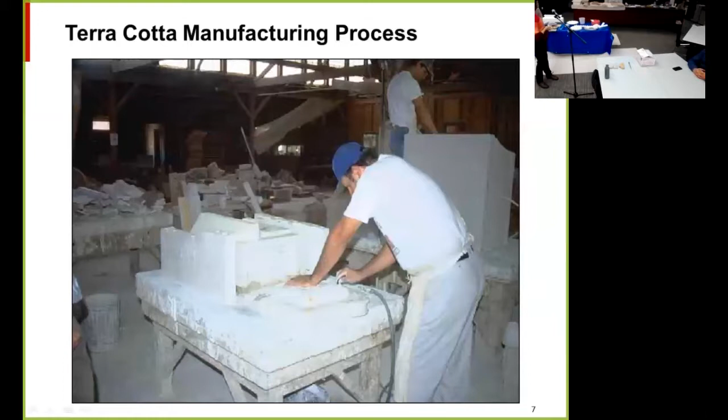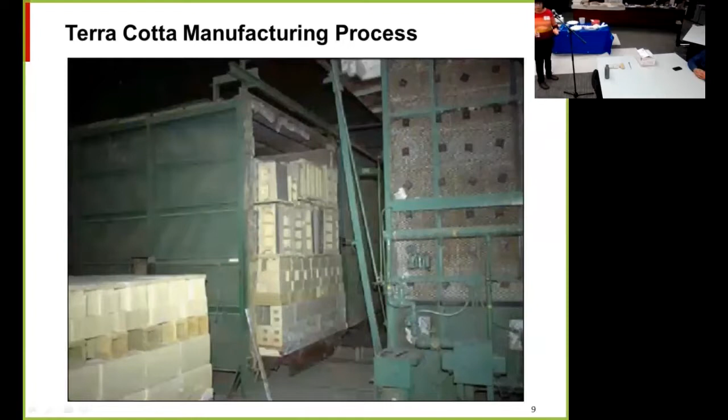They use local clays with different properties for the terracotta. After it's unmolded, it's cleaned up and glazed, then put on carts and into a tunnel kiln and fired, then boxed up and ready to ship.

So how is it used? As I said, it's used for cladding for a lot of different buildings. It originally became popular because it was easy and cheap, and we didn't have as much of a tradition of stone carving in the US and the West as you'd have in Europe. But with terracotta, you can carve one piece and then make more and more pieces from that. So it's kind of ironic that at the time it was originally a cheap imitation for stone, and now it's a very expensive material that we're trying to restore and retain.

The glaze allows all different kinds of colors. When it was originally made, it was advertised as needing no maintenance, and the glaze was thought to be completely impervious, so there wasn't a lot of thought given to flashings or waterproofing. It's also fire resistant, so it's often used for cladding. I have a couple of pieces up here.

You can see this is a piece of old terracotta from St. Dominic's Church, and it has a really red bisque or clay body. This was actually manufactured, I think, in Seattle, Washington State, so it's a little different than what we usually see on most of our buildings. This one is kind of a yellow color, Gladding McBean terracotta, a new sample of a new piece, and this is a piece from 140 New Montgomery.

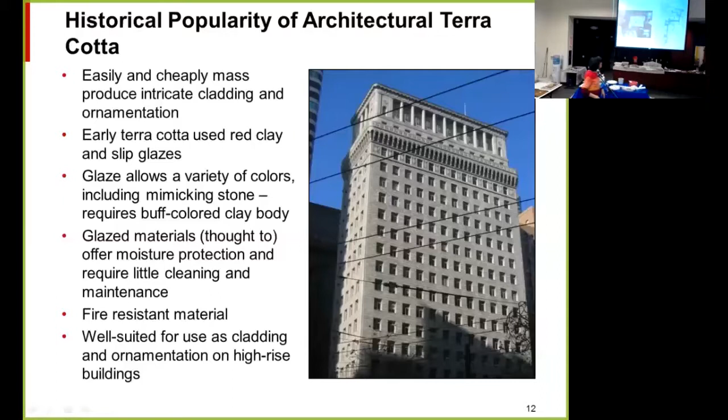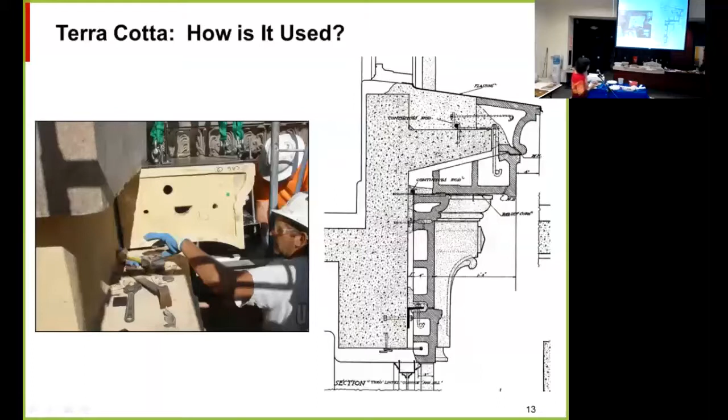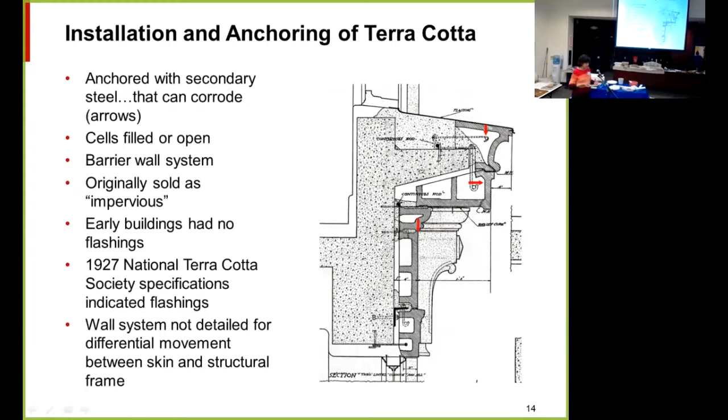Early buildings didn't have flashings, but then the National Terracotta Society, a group of terracotta manufacturers that got together to write standards and improve the practice, published a standard in 1927. They published specifications, and they did indicate flashings at that time. Another thing about terracotta buildings is the wall systems were not detailed for any kind of differential movement or expansion and contraction, and that'll become important later when we talk about different problems that terracotta has.

So how does it fail? Probably the most common type of failure we see are what we call glaze spalls, where little pieces of glaze start coming off, and eventually you can lose lots of the glaze of the terracotta. There are a lot of different reasons you can get glaze spalls. I think the most common one in California is that water gets into the clay bisque through a little crack or open joint or something, and then it's trapped behind the glaze.

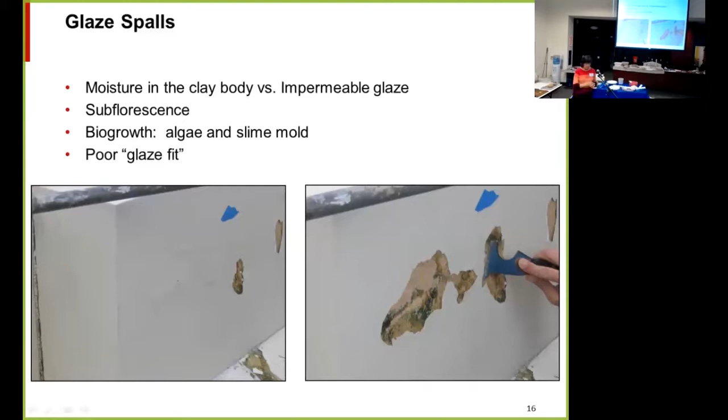Another reason we see less commonly is poor glaze fit. You don't see it anymore because the manufacturing of terracotta is so much better. But if the coefficient of thermal expansion of the glaze and the clay is different, it has poor glaze fit, and as it goes through temperature changes, or even just as it comes out of the kiln and is cooling off, the glaze can spall off.

Glaze crazing are those fine little cracks you might see on an old Chinese vase or antique. But we also see those on terracotta. I think those are caused during manufacture by a difference in contraction as the clay and glaze are cooling, and I've found that they're not usually problematic. I don't usually try to do any repairs to the crazing, because if it's just small, fine cracks like that, you can let them be. They're usually so small that water can't really get in there.

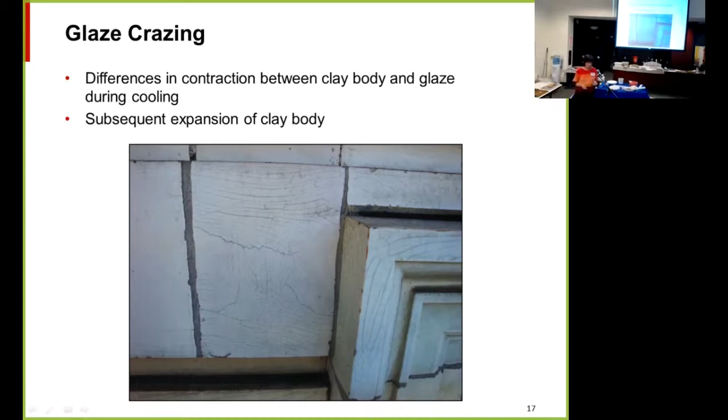Another problem is bisque spalling. Probably the most common cause of bisque spalling is corrosion of embedded steel. A lot of terracotta, as I showed you before in that cross section, is hung from mild steel, and then water gets in. As steel corrodes, as you know from this morning, it expands and takes up more space.

It expands enough that it can crack and spall the terracotta. Terracotta can also spall from freeze-thaw expansion, expansive properties of the clay, or an accumulation of salts in the terracotta.

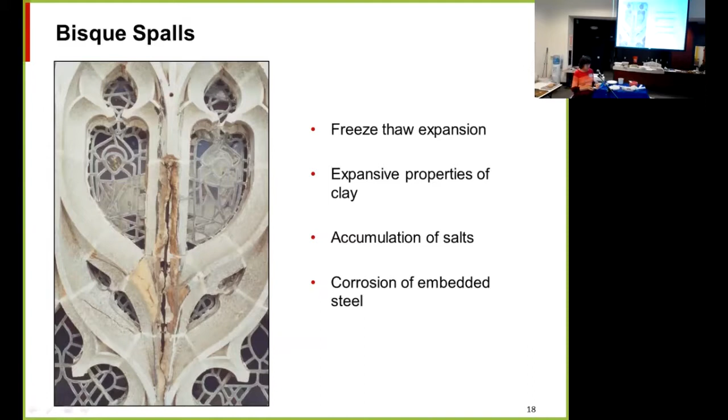Sometimes the failure of terracotta is really subtle and really hard to see. This is a building in San Francisco that I was just up on last year. I was on a swing stage really close to this, and I could see these cracks. I was with a contractor.

We were doing some emergency stabilization of loose pieces so they didn't fall onto the street. I said, well, let's just try and put some stainless steel anchors in this to hold it on. So he was getting ready to drill, and just this whole chunk of terracotta, about as big as my arm, just kind of came off in our hands. So to understand what's going on with terracotta, you really have to get up close to it.

I think you'll notice a theme as we go through here about terracotta failures. The enemy of terracotta is really water, and water getting into the terracotta and into the backup.

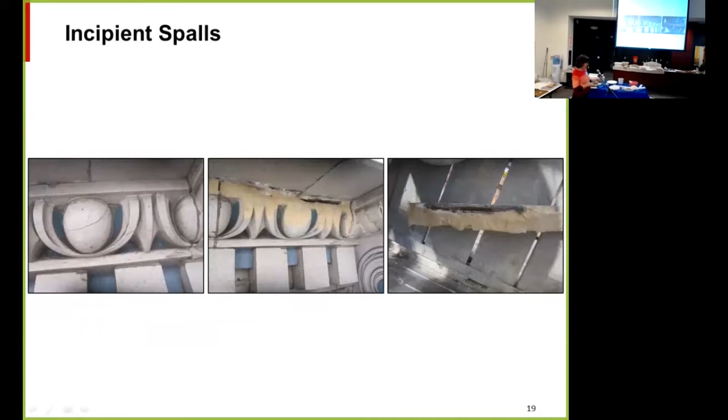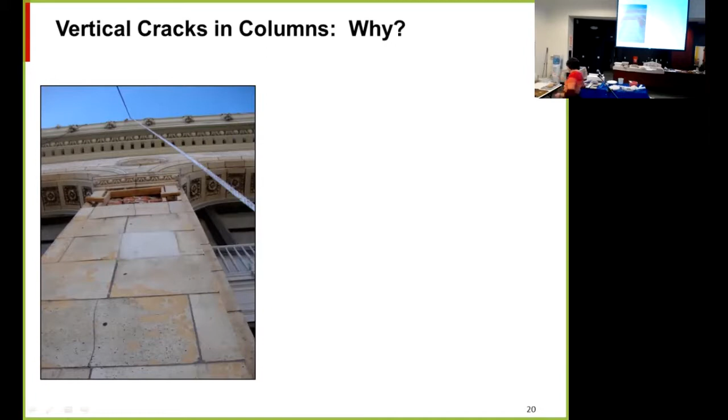Right. It has a steel column behind the terracotta, and that steel was corroding. So here's the steel column, and you can see the cracks coming right from that corroded steel column.

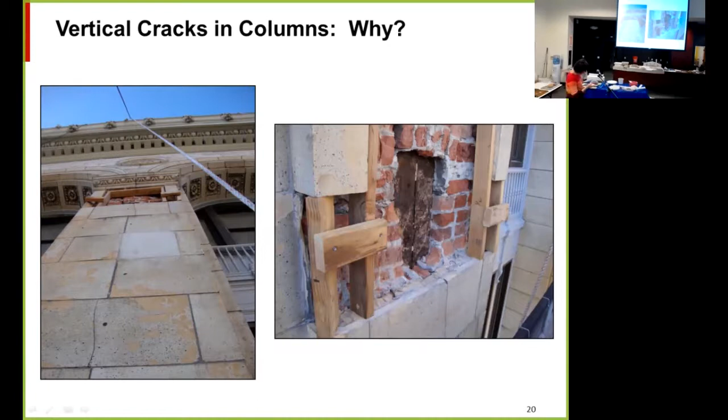Movement, that's true. Okay, so terracotta grows over time, like all fired clay products, like brick, but it grows much more than brick. So when you take a piece of terracotta out of the kiln, it's the smallest it will ever be. And over time, it's just going to grow.

This was a concrete frame building. Concrete shrinks over time. As you put load on, when it dries, it shrinks. And then as you put load on it, it also shrinks, doing something called creep. So this building had no provisions for expansion and contraction, and it was basically tearing itself apart because the internal frame was shrinking and the terracotta was growing.

There was also a problem with shelf angles that didn't quite reach the corner. I haven't seen this as commonly, but I've seen it before. Shelf angles are a pretty common problem.

A lot of times you'll look at a brick or terracotta building and see these vertical cracks right up the corner. It's because they didn't know what to do with the shelf angles coming from one side and the other side, and at the corner they don't quite meet and there's no space for them. So then you have every story of terracotta supported on the shelf angle in the middle of the wall, but at the corner it's just kind of stacked up from the ground. And those things are going to move differentially.

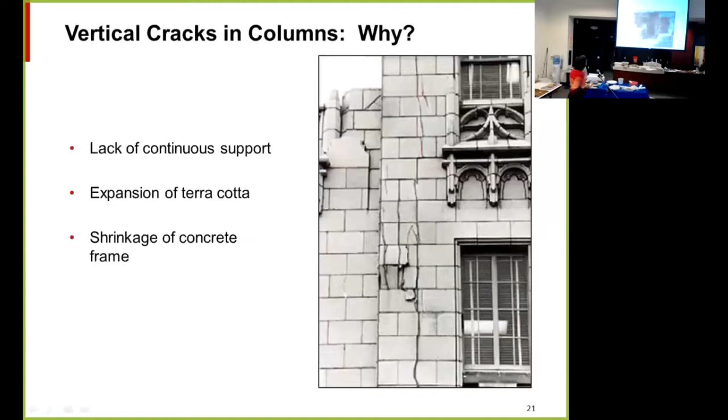There is a column going down through the middle of the bricks, and when we first saw the cracks, we thought that column's corroding. But then we did our openings, and the column was not corroding. So what was causing the problem here?

Right, right. So these are header bricks, and they should go back through a couple of wythes of brick. But in this case, they didn't. They were false headers - they just cut them off. So there was no real attachment of brick back to the steel.

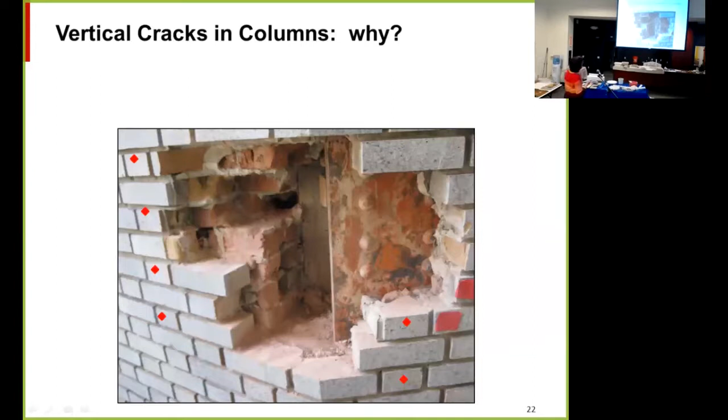And how about that? Also from an earthquake, that's pounding damage, a lower part of the building pounding against the tower it's built right next to.

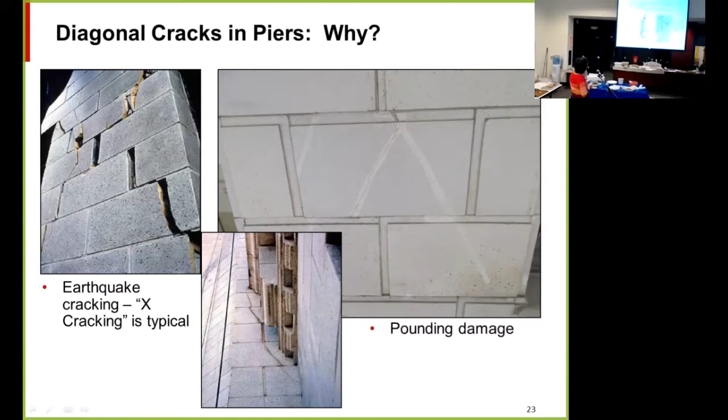So I talked a little bit about shelf angles. Most terracotta you'll see is on transitional masonry buildings, which are steel frame buildings with brick or concrete infill and a terracotta cladding. The terracotta rests on top of the shelf angle.

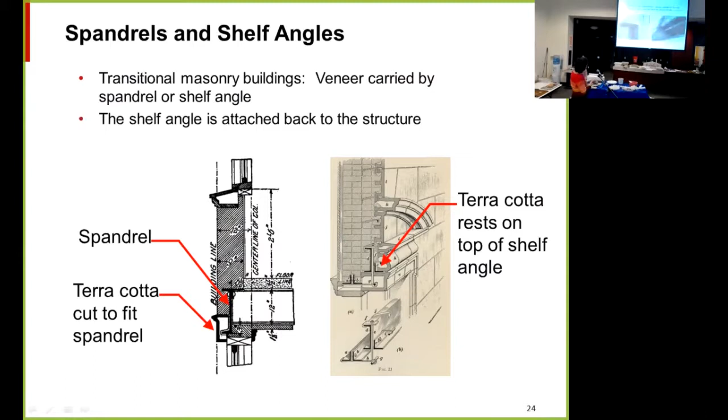Shelf angles and lintels, by their nature and function, are really close to the outer surface of the wall. That means once water starts getting into the wall, they are the first things to corrode, so they're really vulnerable. And when they start corroding, they crack the terracotta.

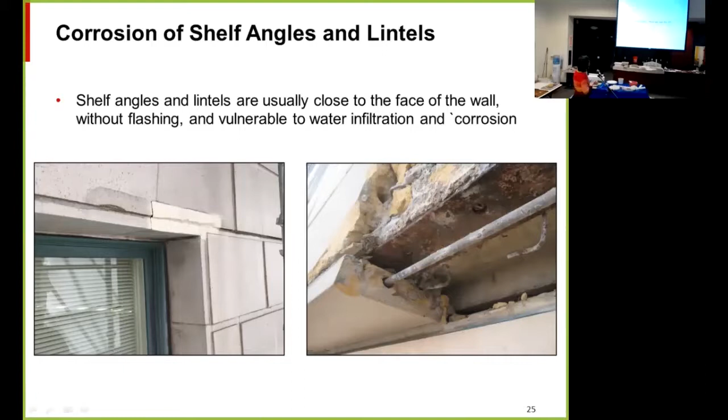All right, how do we fix it? I think, as other people have talked about, before you can decide what you're going to fix, you have to know what the problem is. So you have to do some investigation, and once you figure out what the problem is, how many of the problems you have and where they are, you can start designing your repairs.

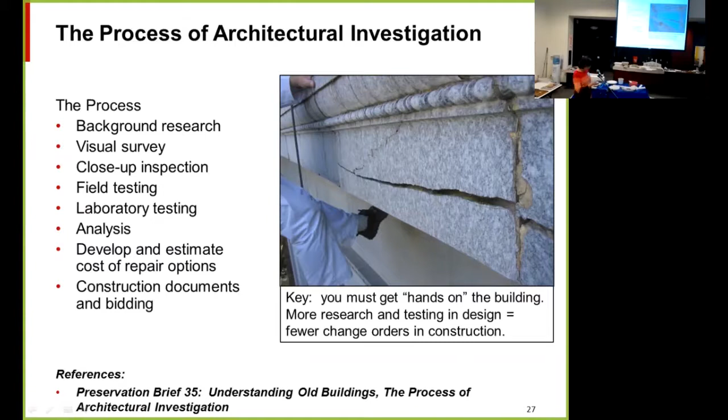How the Secretary of Interior Standards applies: it allows for the repair and replacement of deteriorated features while maintaining the historic appearance.

Generally, we try and repair rather than replace. Sometimes we have to replace features either because they're too deteriorated to repair or because they're covering something that is the root cause of the problem.

For example, that column cracking I showed you is because of the steel underneath it corroding. There's really no way to repair the steel except to take the terracotta off, clean up and paint the steel, and replace it.

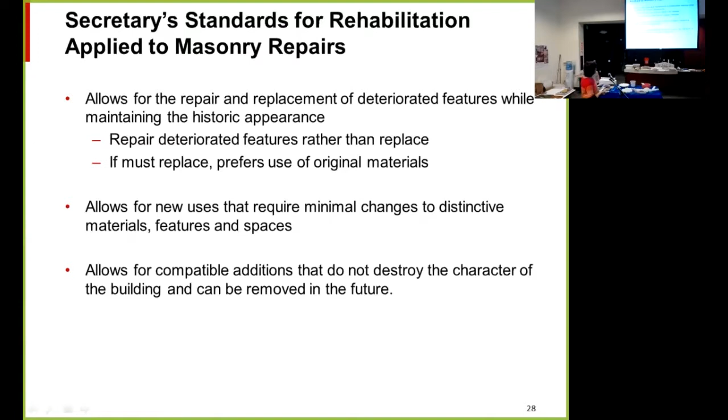As you know, there are 4 different Secretary standards. Rehabilitation is the one we most often use that seems to apply to this type of facade repair. It allows for new uses that minimally change the materials and features and allows for compatible additions.

So I guess I talked about this a little bit. You want to diagnose the problem, maybe look at a range of different solutions, try and repair rather than replace, and replace in kind if you can. There are a lot of substitute materials for terracotta, but you have to understand the ramifications, both visually and performance-wise, of using substitute materials, and understand the visual implications and durability of repairs.

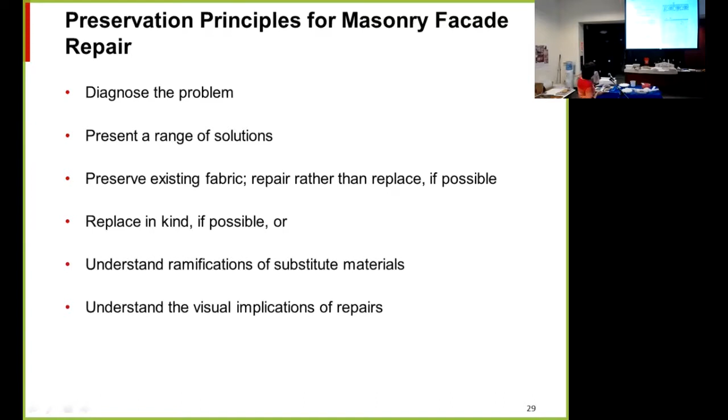So there's a couple of different approaches. One approach for surveying a building and getting the project out to bid is to do a 100% survey. We have done that, where we go and look at every single block of terracotta.

Put everything on CAD drawings in the field using a tablet. The advantage is you can get much more precise bids, and sometimes that's really required by public agencies who want to know exactly how many blocks they're going to replace. The disadvantage is there's a huge upfront survey cost because you have to get on a swing stage or whatever to get up close to the building and survey every single block.

And even after you've done that, inevitably something will happen during construction, like you start taking blocks apart and the backup wall isn't what you expect. So there's no guarantee there's not going to be some kind of surprises during construction.

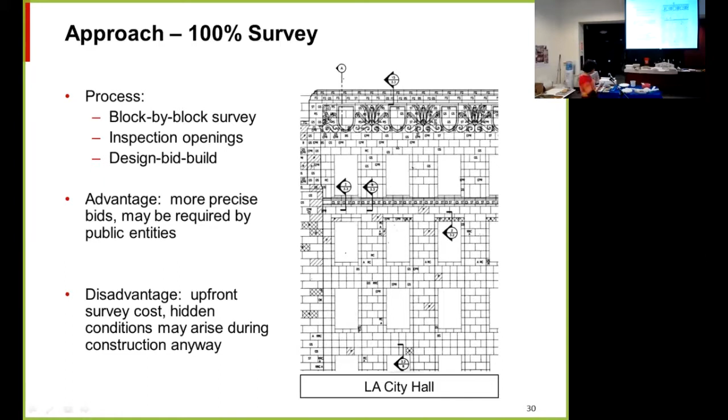The other approach is a partial survey. To do that, usually we start with a binocular survey, pick out areas we think look suspicious versus areas that look typical, and then do a close-up survey of a representative area.

When we do that, we usually try to bid with allowances and unit prices, so that if there are more or fewer repairs, that can be adjusted using the unit prices. That has a much lower upfront cost, but the disadvantage is there's more of a risk of change orders during construction.

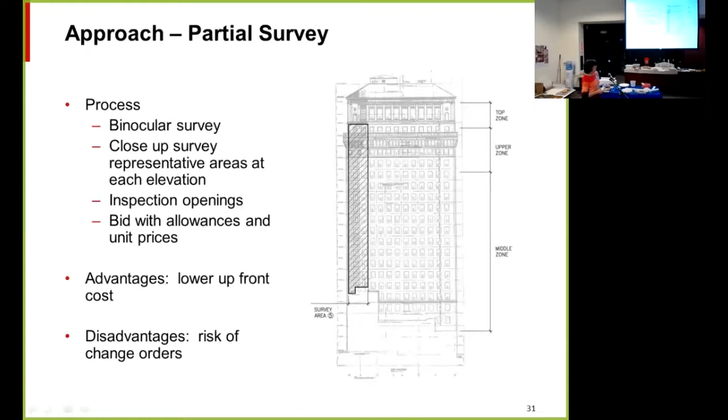Either way we do it, usually in our specifications we put in a quantities table. The important thing is that you need to decide on what your quantities are going to be and what your specs are going to say before you go out and do the survey.

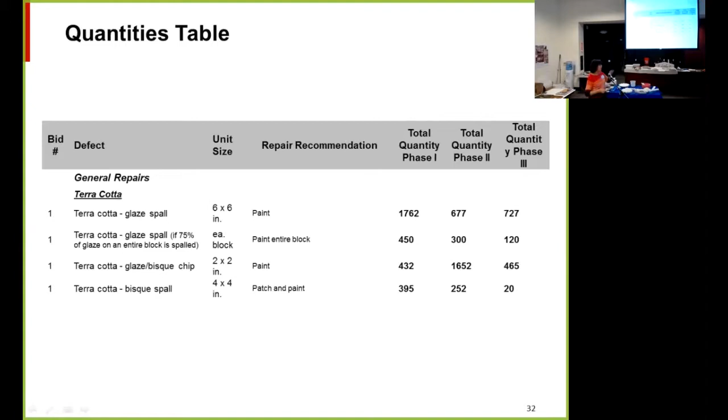Because if you go out and count, say you have 4,000 glaze spalls, but then your specs break it down into 2x2 inch spalls and 4x4 inch spalls, suddenly your survey doesn't help you. They have to be correlated, so you have to be surveying the quantities and the repairs that go into your specs. This just follows through with the same thing on a bid form, putting in unit prices.

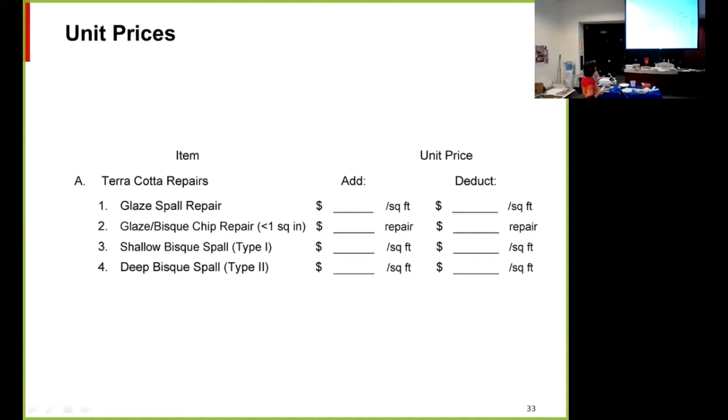This is a whole list of different repair techniques, but I'm just going to talk about each one of those.

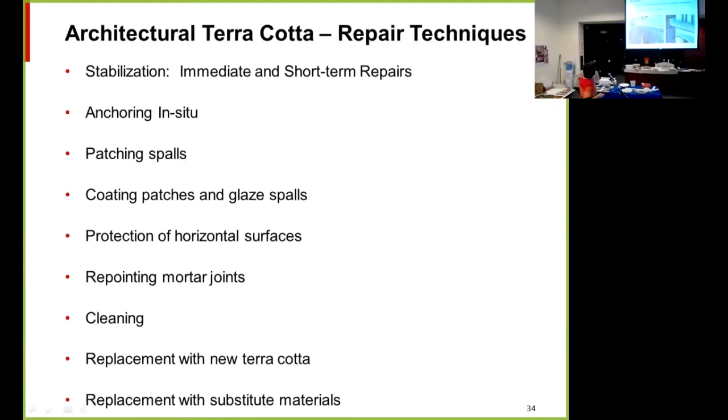The first one is stabilization, and that's when you go up and see something that's going to fall on the street and you have to do something to stabilize it. There's all kinds of different straps you can use, wrapping features like that, putting up a sidewalk canopy to protect pedestrians. Those are all temporary measures. They need to be monitored and they're not a permanent repair.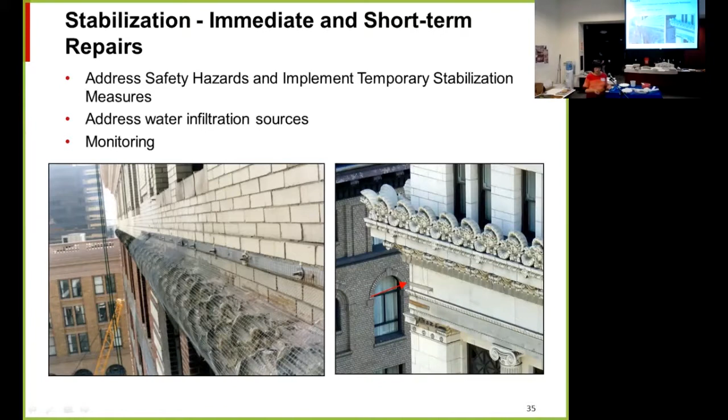San Francisco has a new facade ordinance that was just passed in March or April of this year. The California Building Code requires that buildings be maintained in safe condition, meaning the owner can't have pieces falling off of the facade. The purpose of the facade ordinance is to ensure that building facades are maintained and reduce falling hazards, clarifying requirements already in the building code. A side benefit of keeping buildings maintained is hopefully there will be fewer pieces falling off in an earthquake, but it doesn't require seismic retrofit of facades or upgrading them - they just have to be returned to their original condition. It requires facade inspections on a 10-year cycle. The first cycle of buildings is due in 2021, so building owners have a while.

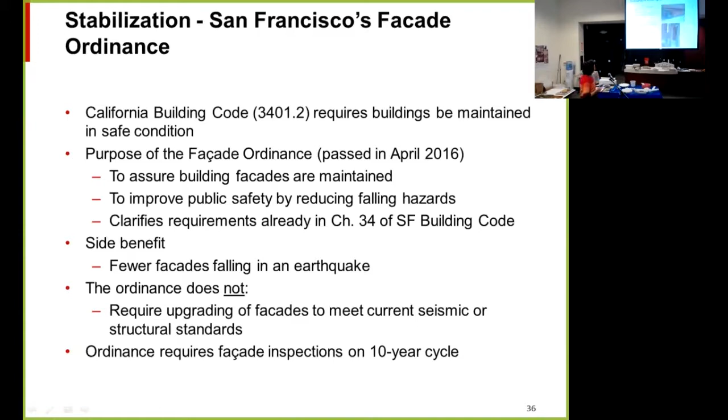In thinking about repairs, we all want our repairs to be durable. If you ask me, durability and sustainability are almost the same, because if you do a repair and it's sustainable, then you're not going back and spending energy to keep working on that building. So one thing to think about is the durability of the different components in a repair. For example, putting a stainless steel edge on a flashing makes it more durable than if it was just the Perm-A-Barrier. Using stainless steel for reinforcement rather than galvanized steel or mild steel makes a more durable repair, even though you can't see it - those pieces are all hidden.

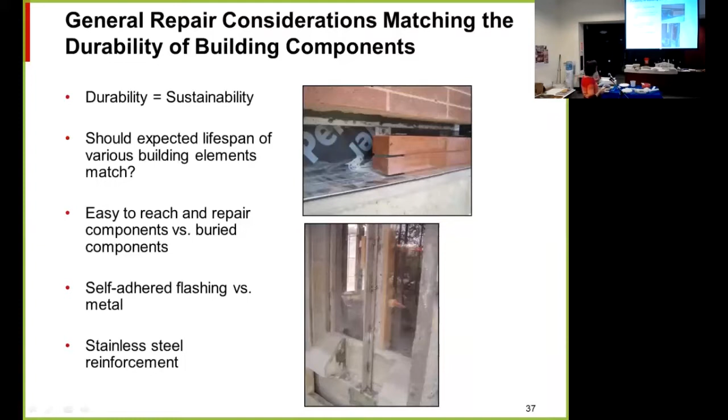Mock-ups are really important. We always define mock-ups in our specifications. They form the standard for the rest of the work. We'd like them to be done by the same workers who are going to work on the rest of the building. And we always put in our specs that no work is to be done until the mock-up is approved by the engineer, architect, or owner.

I did once have a contractor, and I went out to site to see the mock-ups, and he had written, in big chalk across there, 'approved.' And I said, 'who approved this?' 'Oh, I did.'

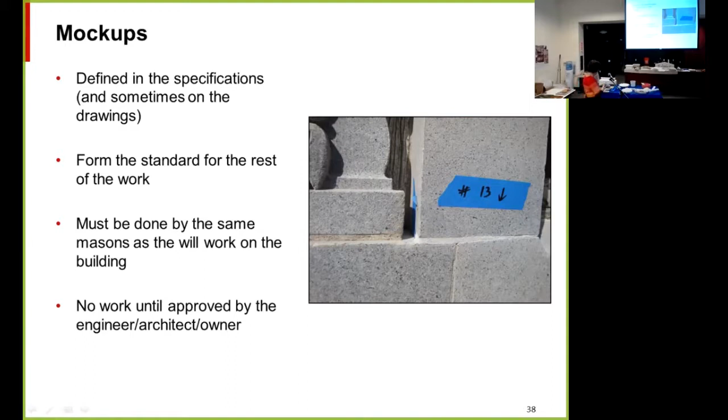One approach to terracotta that's cracked but not too damaged to repair is to anchor it in place. There's a number of different ways to anchor terracotta. These are discreet repairs. Before doing that, you really have to understand the structure behind the terracotta, the load paths, and how you're changing that structure by anchoring it in place.

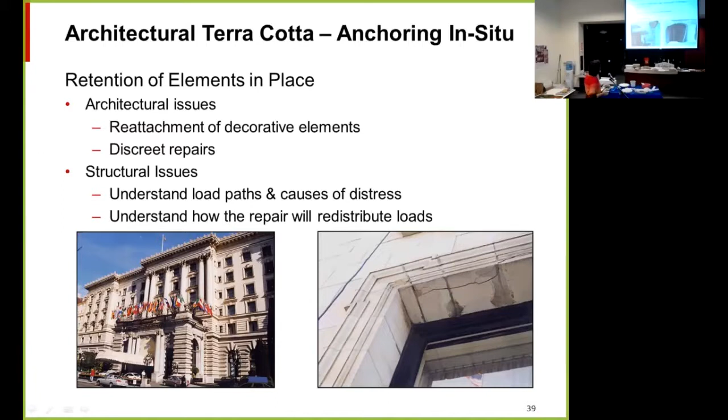A couple of different fasteners that we use to anchor terracotta. One is called Helifix, or a helical anchor, and I have one up here - a threaded anchor. I really like it because you don't have to mess with drilling a hole and putting epoxy in it. You just drill in the helical anchor, and it forms its own threads and grabs onto the terracotta.

We were doing some repairs on another building that had previously been repaired, and we found these helical anchors. See, this one went through fine. This one just went up and bent against the terracotta. So I guess that's a good lesson to make sure that when you put the anchors in, they're really grabbing something. A lot of times we'll pull test a certain number of the anchors.

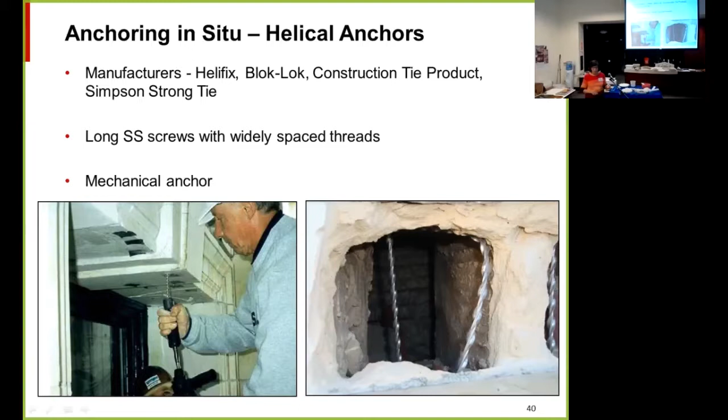Another type of anchor is our epoxy set anchors. Usually we use stainless steel threaded rods and fill the hole with epoxy and then put the threaded rod in. We use those both to anchor existing terracotta and sometimes to secure new terracotta blocks.

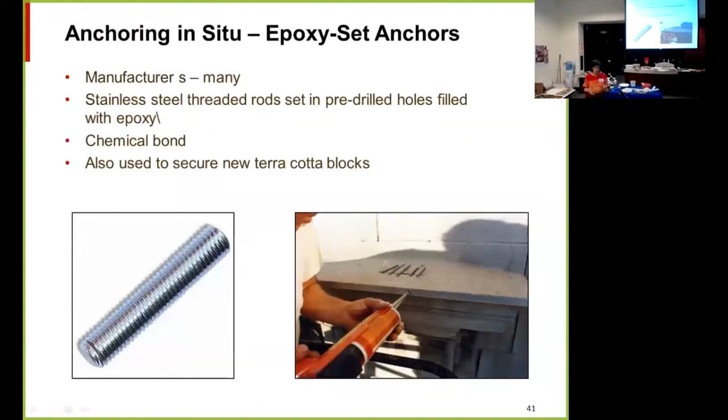Grout set anchors are for where you have more of a rubble wall and you can't really put in an epoxy anchor because you would just end up filling the wall with epoxy. This has a sock around the stainless steel pin and you fill it full of grout, and it just fills up that empty space and anchors the facade.

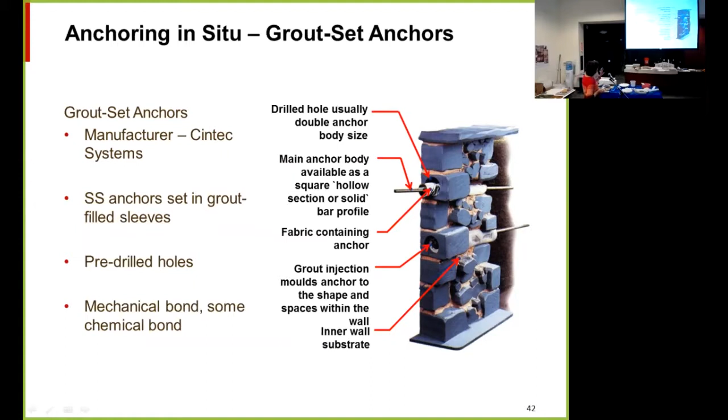Expansion anchors - there's a lot of expansion anchors on the market, and sometimes we can use those to bond the terracotta back to maybe a brick or concrete backup wall.

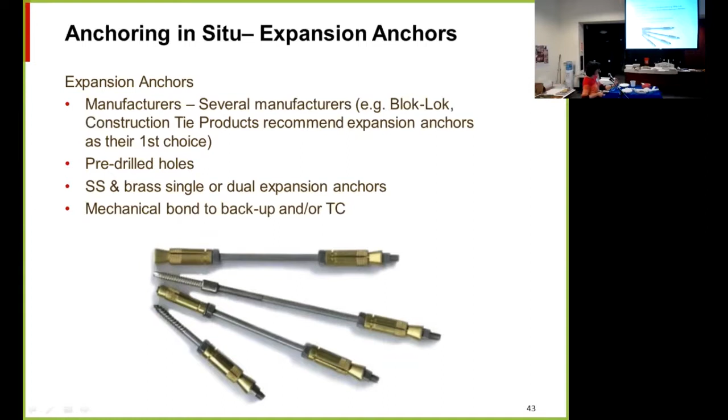Most terracotta that we work on involves a lot of patching of cracks, spalls, and glaze spalls. If we replaced every block of terracotta that had a spall, we'd be stripping all kinds of buildings. So usually we patch the spalls.

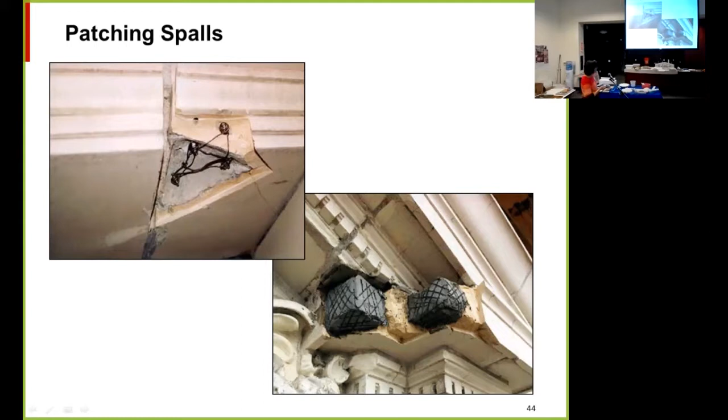Finishing it with the same texture as the terracotta is really important, and then that patch will be painted afterwards to match the color of the terracotta.

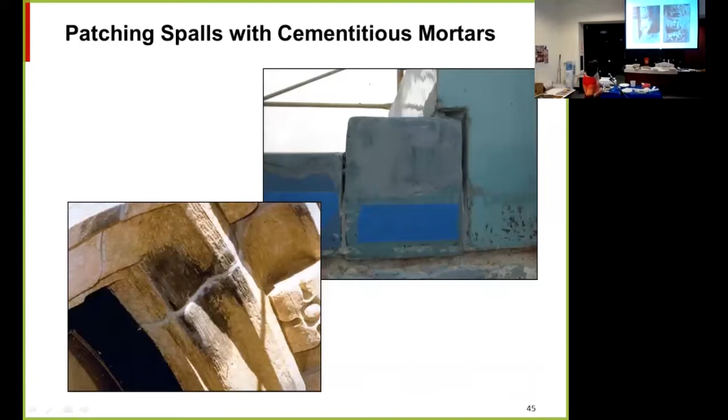But that's the only time I've ever seen it used. The traditional way is with a cementitious mortar.

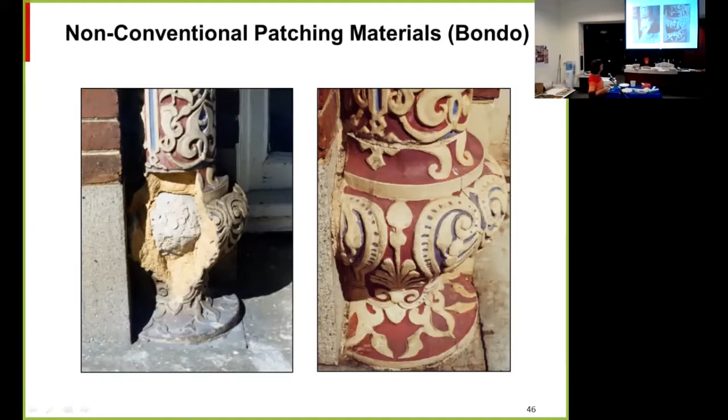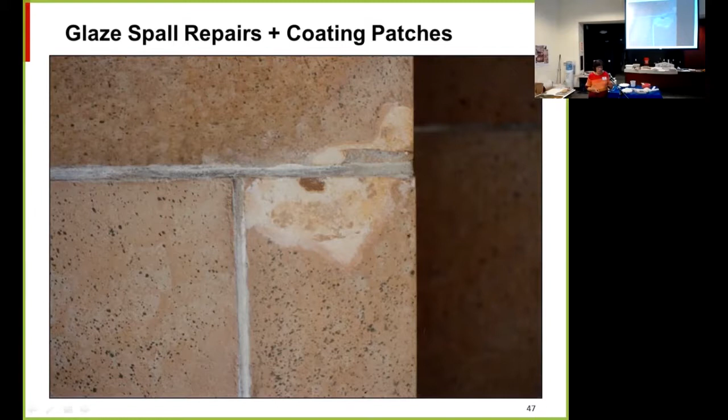Once you have the patch, or when you have a glazed spall, you want to coat it with paint to mimic the terracotta. There's a couple ways to do that. With a glazed spall, if it's not too deep, you can sand off the glaze, remove any biogrowth, paint it with a base color, and then using either a sponge or a brush, get the speckles in there.

If the terracotta is a plain white glazed terracotta close to ground level and you do that, you'll see a little indentation everywhere you've painted the glaze spall, because the paint isn't as thick as the glaze. In that case, you can use some specialty mortars that go on really thin to bring out the surface so it's a nice smooth surface again.

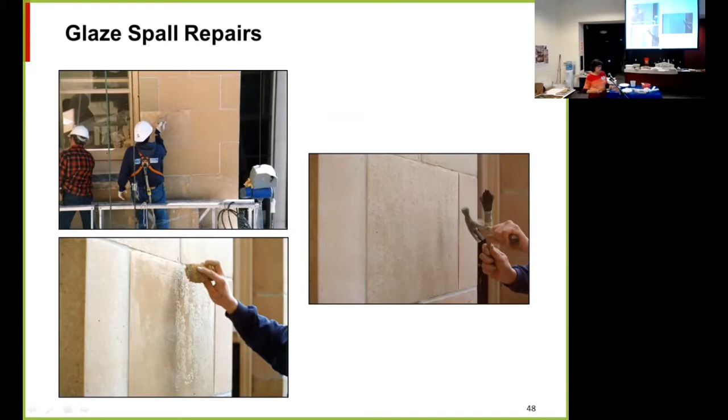Another important part of terracotta restoration is keeping water out of the terracotta once it's all restored. A lot of times we're adding sheet metal copings to the roof, and fixing roofs and gutters so that they don't leak.

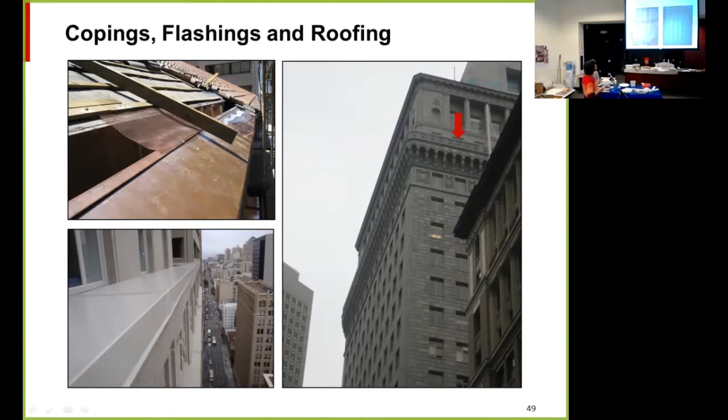Repointing mortar joints, just like for stone masonry or brick or anything else, is a really important part of terracotta restoration.

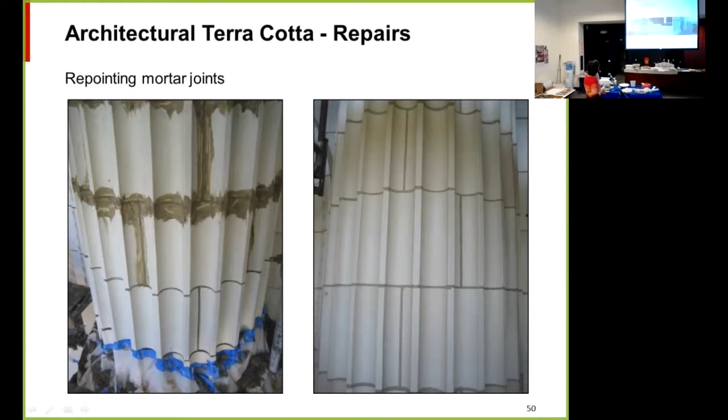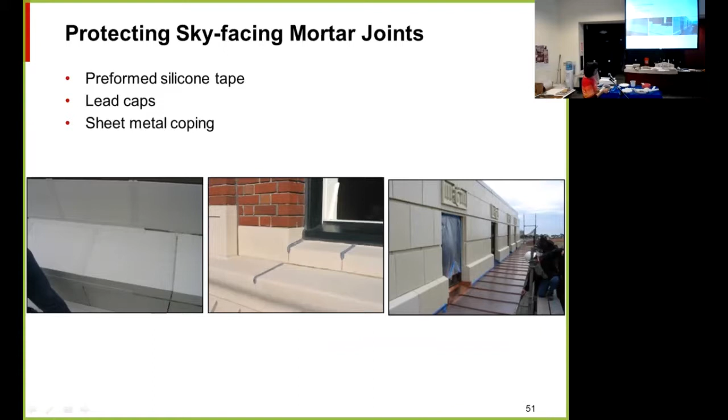When you have sky-facing mortar joints, like on cornices, we want to protect those too. I've used three different ways of doing that. One is preformed silicone tape, which you can put over the joints. Lead caps are pretty common to set in the joints, or else putting a copper sheet metal coping over it.

Cleaning terracotta, similar to cleaning other kinds of masonry buildings, you always want to use the gentlest possible method. It used to be that we used a lot more chemical cleaners, and now with environmental concerns, it's gone much more to just warm water, pressure wash, or even non-ionic detergent and water with some brushing and elbow grease. Most terracotta cleans up really well because of its surface, dirt doesn't really get in there that much, so usually you can just clean it with warm water.

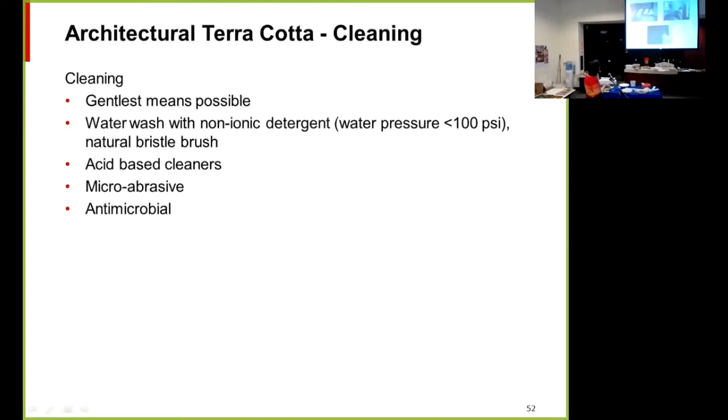Here's some different examples of chemical cleaning, and also microabrasive cleaning. Microabrasive doesn't mean sandblasting, which will totally destroy terracotta, but using very low pressure. I think the JOS system uses little glass beads, and there are other types of abrasives too, like walnut shells being used also.

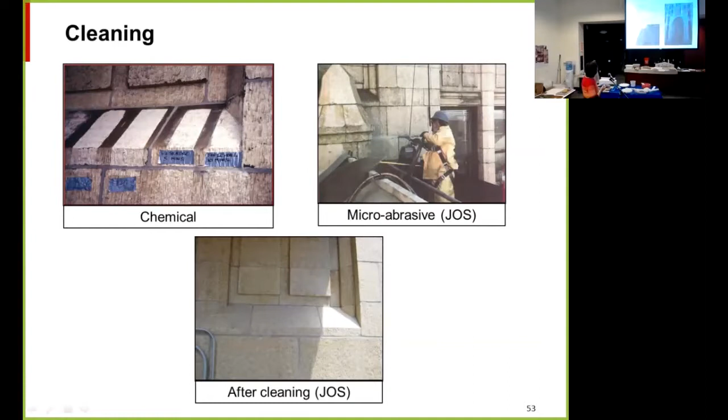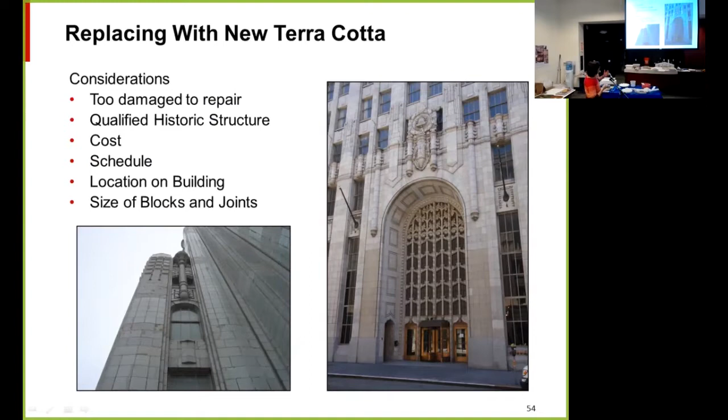When the terracotta is too damaged to repair, you might want to replace it. One thing to be cognizant of, which seems pretty obvious, is to replace the blocks with the same size blocks and the same joint layout, because if you don't, it'll look kind of odd, where the blocks are a different size.

One thing that most owners don't realize until they've worked on a terracotta building is the schedule. You want to start early because you have to obtain samples from the building, send them to her, and she does a glaze match. You get back samples like this, a bunch of different glazes, and you take them out to the building and hold them up to the terracotta. You'll say no, that doesn't match, you need more white, it's too yellow - back and forth - and then they'll have to make new samples and fire them, and then you get a glaze match. So that's kind of an iterative process.

Then there are also specs. There's pre-production testing to make sure the terracotta has the properties you want. There's shop drawings to be made and reviewed, and then production. So you might be talking 5 to 9 months for the whole process before you get the first block of terracotta on site.

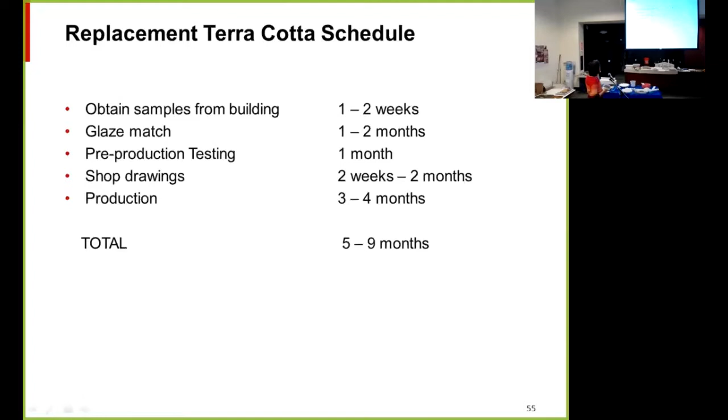In production testing, usually we don't require all those tests, only saturation coefficient and compressive strength. During production, you're getting these every so often, and you can compare them to the pre-production results. If you start to see some big change, then you know maybe you need to go back and test the other things to see what's going on.

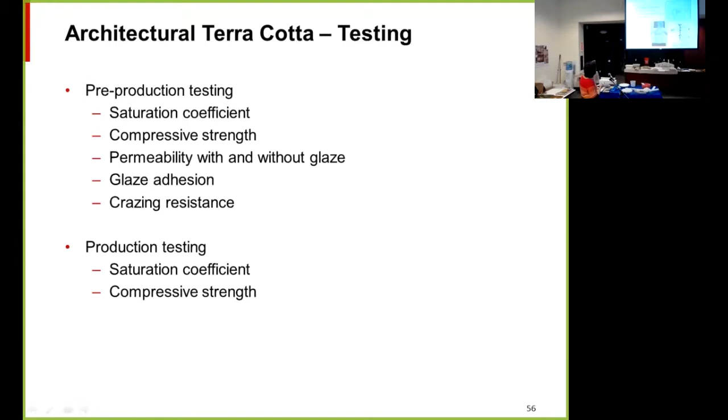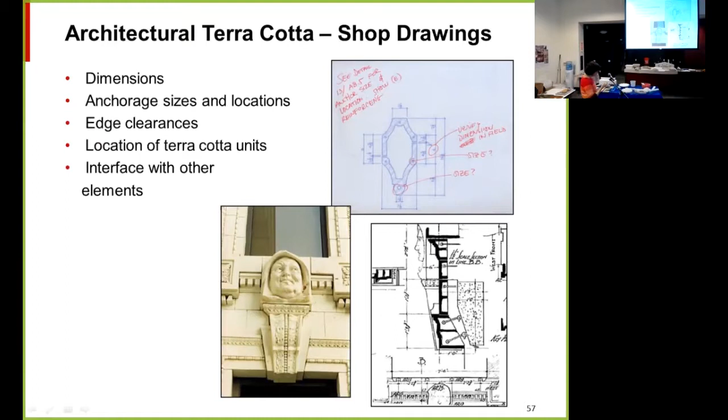And then glaze samples - I think something important about glaze samples is I always want to see the whole range of colors, because you can take one glaze mix and put a bunch of blocks in the kiln and there will be a variation in the way they come out, just because of the temperature in the kiln at different points. So I want to see a sample of what the expected range is, not just one piece.

The other thing is these older terracotta buildings - the kilns weren't as regulated as they are now. A lot of them were made in beehive kilns, so the terracotta was just all stacked up and fired, not the tunnel kilns, so the temperature had a lot more variation. So if you look at most older terracotta buildings, you'll see a lot of variation in color from block to block. But if you just pick one of those blocks and get a glaze match, the manufacturer is so much more precise now that it'll stick out like a sore thumb, because all your new blocks are going to be one color. So we almost always require maybe 3 or 5 colors so that you can get that variation that you see on the original terracotta.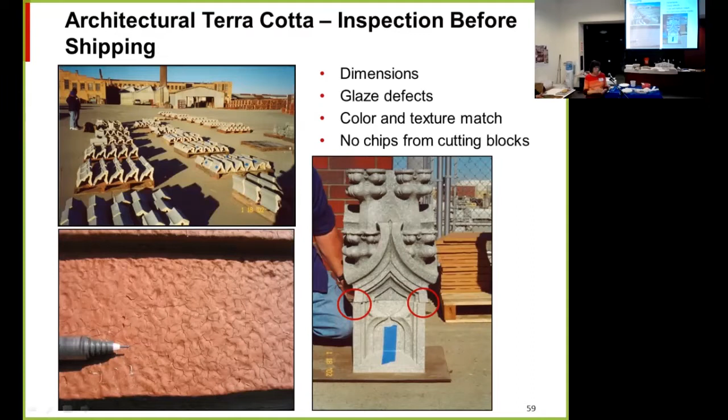Just a couple of examples of terracotta replacement. This was a cornice block that was seriously cracked because the angles that supported the cornice were corroding. So we had new blocks made - here you can see the new blocks. And then we had new steel made, filled these cells on the sides with grout, and then just lifted it up, put the block in there, and let it set.

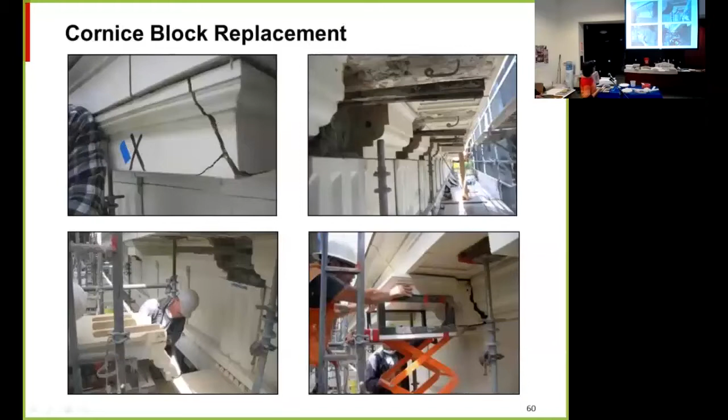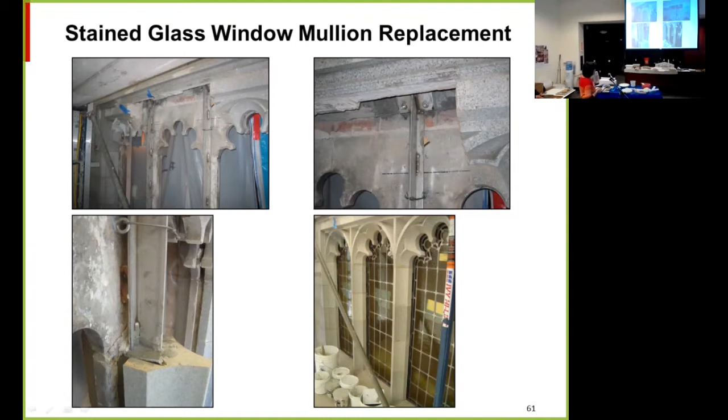These are terracotta blocks from a church in San Francisco. Here you can see we put in new stainless steel reinforcing to anchor the block to, and here's the wire ties. The mullion blocks are going in, and then the wire tie goes around that piece of stainless steel. And this is the building I showed you where we had the problem with the steel columns corroding.

These are channel anchors. We wanted a way to anchor the new terracotta back to the brick, so we installed these stainless steel channels.

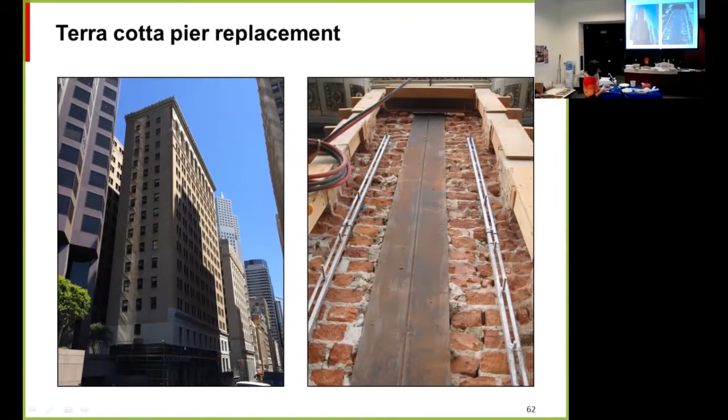Here's a close-up of them. They're anchored with threaded rods set in epoxy-filled holes. So you put the channels up there, here's the tube to put the epoxy in the hole, then put the anchor in and put the nut on the anchor.

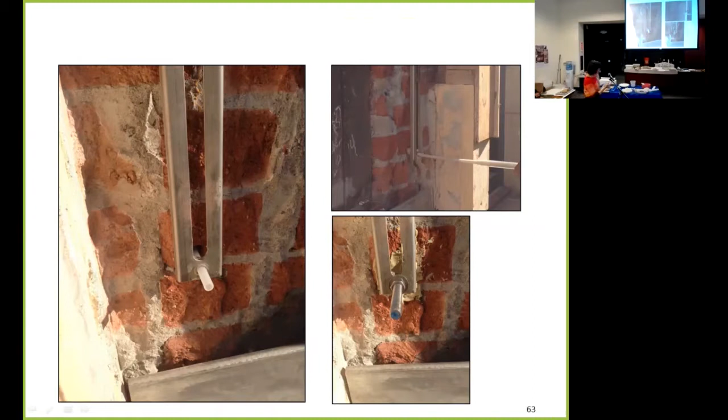This shows a shelf angle. We had a shelf angle, I think, at every floor line. And here they're setting the block into place on the shelf angle.

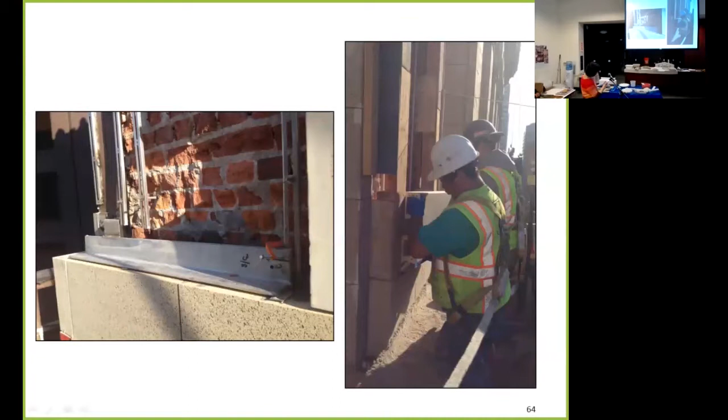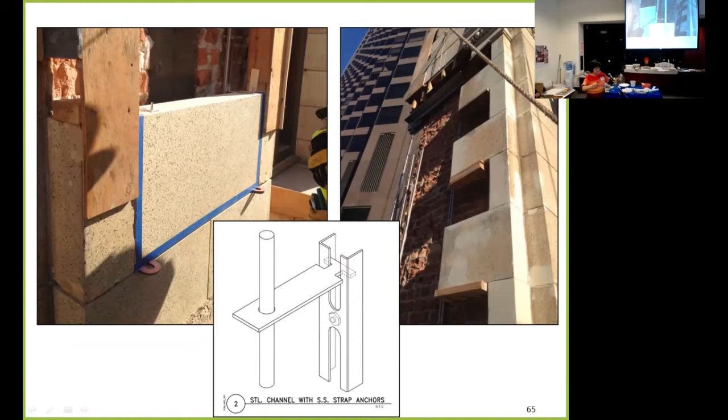In this channel anchor will be what's called a dovetail anchor, which is a strap that comes out and has a little pin that goes up and down. So here's the strap coming out, and the pin will go down into the block below. Then you take the block above and set it on those, and that pin will go up into the block above.

So some key ideas about terracotta: you have to understand how the materials work, the properties of the terracotta, like that it expands, and how it's used and how the whole building works.

You want to diagnose before you repair, perform an investigation. Watch out for water, because that's the source of lots of problems with terracotta. And do no harm, less is more, always works in terracotta restoration, unless there's some hidden problem or the causes of the failure are not addressed. You always want to make sure to address the causes of the failure.

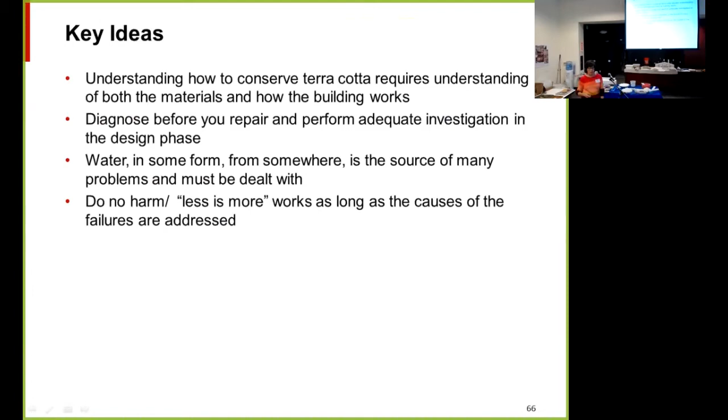Okay, thanks. Questions?

No questions online, but is there anybody here that has any questions? Wow, there must be something. Okay, I gotta use the mic. See, now I don't want to ask the question.

So you said that the terracotta continues to grow. Does the replacement material grow at a different pace or expand at a different pace than the older material? I know it's something I have to be careful with on adobe, which is different, but you mentioned it.

So the replacement terracotta will also grow. It's still the smallest when it comes out of the kiln. One way we deal with that is, say on those columns, we'd have a shelf angle, and we set the terracotta right on top of the shelf angle, but underneath the shelf angle, we'd put a sealant joint. That would allow the story below that terracotta to grow without smashing into the terracotta above.

So when you're putting in new terracotta, you always want to be careful to typically use mortar joints, because that's what's always been done and that's what works. But at certain locations, you want to make sure to put in some sealant joints so it can expand and contract.

Well, no, I think it's more of a curve, Jamie, maybe you know this. So it expands a lot to start with and then it kind of levels off. So terracotta over time—terracotta that's old now in an old building, it's done growing, so usually you don't have to worry too much about it. It's just the new stuff that you put in.